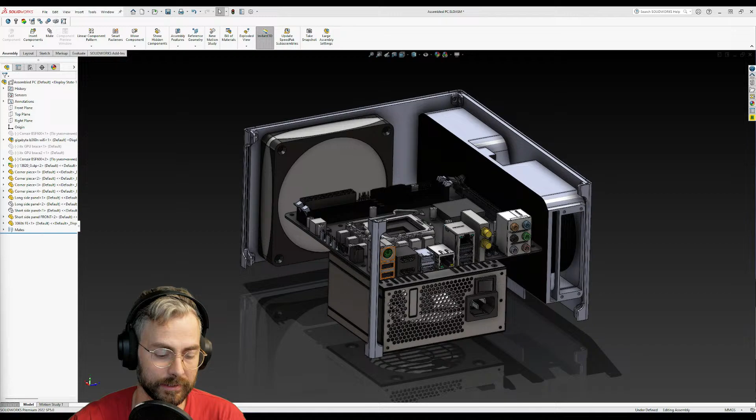I contemplated, should I keep this secretive, keep this to myself? And I was like, you know what, there's no real point, because at the end of the day, what I've done, anyone can do, at least anyone who's got some design software and maybe a few thoughts on how to use it. So we're gonna just go with it.

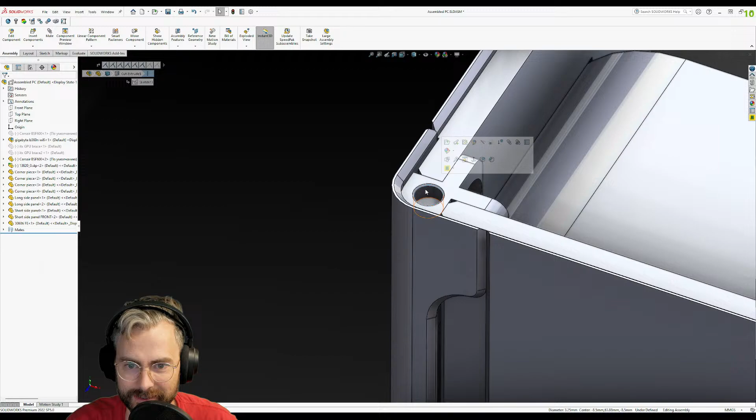This right here is a relief for a magnet to go in. And to give you an idea of how small this case is, these are the magnets that are going to be going in there. They're absolutely tiny, let's just leave it at that. They're 3 mm diameter magnets, so they're very tiny magnets, and that's going to be for the top cover to sit on.

And then in the bottom, we're going to have a couple of hot press inserts. So I've got a group of inserts here that I'm going to be utilizing for the bottom portion to screw in, because this is actually going to be the support on the base that's going to be carrying our power supply, our riser cable that the GPU is going to be plugging into.

Not really much of the weight. I might actually put a couple of bosses on the bottom to sort of support the weight of the GPU, but I've done some finagling to get this down to 7 liters.

So right now we've got a width here of 219.5. So I'm gonna pull this baby on screen. So we got 219.5 by, overall length is 244. You might be like, how the heck did you get 244 millimeters?

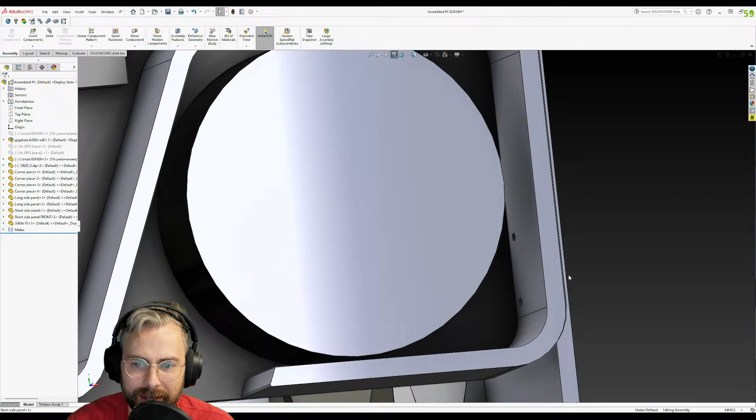Let's do a little cross section here to see a little bit of the trickery that's gone on here. So in order to get this specific design down to 7.0 liters, I've actually cut into these case panels. So these case panels are actually quite thick because they're plastic and they have to hold these hot press inserts.

So this is like 4 millimeters thick. What is that in inches for the inch folk? That would be 4 millimeters - I'm just using my vernier to make a conversion right now. There's probably 100 other ways that I could do that. Yeah, it's about 160 thou. So it's quite thick, a lot thicker than you'd have with a standard metal panel, right?

But I'm 3D printing all of this, and I'm using these hot metal inserts in order to do totally hidden hardware. So overall, hopefully with the 3D printing, this is not going to be as smooth and nice and pretty, but we'll see.

I need to adjust this design. As you see, this is just mashing into that, but I will fix that. But right now, to get this, I've actually cut into this so that we're at like, what did I get, like 1 millimeter thickness here.

So that actually I've taken the IO piece off of the GPU. That's going to be fully removed, and it's going to be sitting in there on a ledge. And I'm going to be using the IO piece mounting hardware to actually mount it directly to the case panel. And then on the other side, there are these attachment holes that are on the Founders Edition cards.

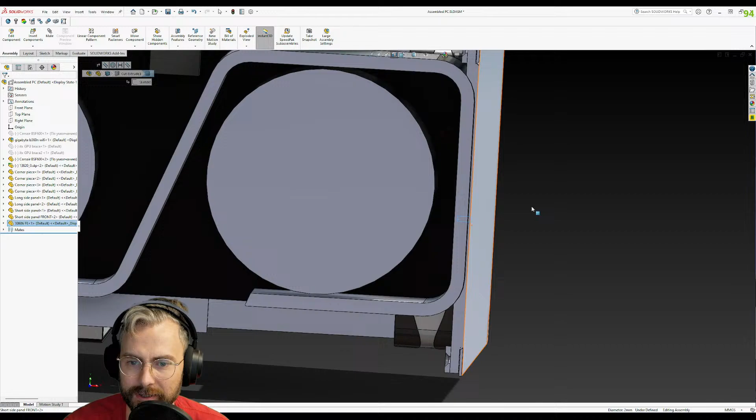And I may actually just do the same here. I might not, just because it's a little bit redundant because this is already sort of held in place and I've already got a piece that's carved out for this to sit in. But either way, we've got 244 in that direction.

And this is with the 3060 Ti Founders Edition. I know there's shorter versions of the 3060 Ti we could put in there, single fan, ones that won't even extend beyond the motherboard. And that would be great. That could actually bring this down significantly as far as size is concerned.

We could probably lose another... Actually, I'll just bring it to here because we would probably want a fan in there. 40 mil, so we could probably take another 40 mil off of this. We could probably get under 6 liters if I had a single fan ITX size card. But I've got the dual fan, 240 mil, 242 mil long Founders Edition.

So that is in there. So that's 244. And then we have our height.

So I'm going to have on the top here, there's going to be a piece that is 1 millimeter thick. And we're going to go all the way down to the bottom, which is going to have also a 1 millimeter thick part on the base there. So we're going to have 131 millimeters tall.

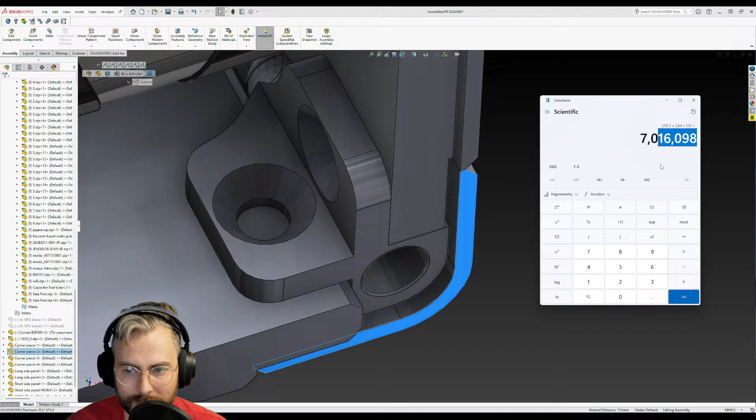To give us 7.016. Now I know you're like, '7.0 is what you said, 7.0 liters,' yes. And if you round, it is a 7.0 liter case. Give me a break, but that is the facts.

Now, my goal today is not necessarily... it's a little bit late, it's like 11 p.m., right? So my goal is, let's get rid of this cutaway, is to get this guy designed nicely. Maybe adjust this right here a bit more. Why is that so far down?

So far down. Let's see. Maybe I need to make this 129. Update. That's better.

Okay, it's up there. Ooh, how far more? Half mil. Gonna take another half mil off there. 128.5. There we go.

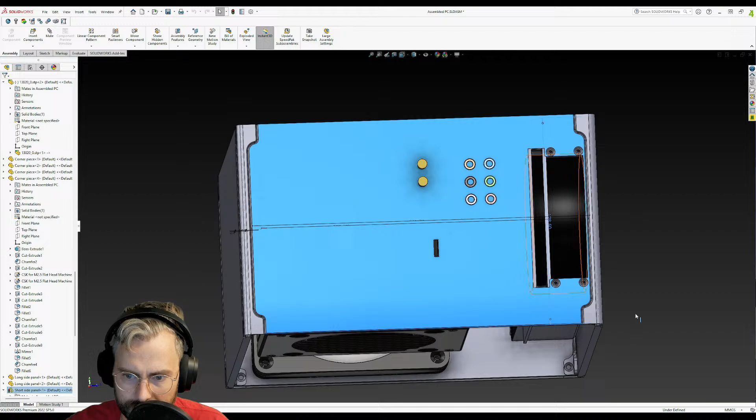All right, that will be flat in there. Now I am going to actually extend this up that 1 mil because it'll be a lot better just for keeping that line constant, and then this plate here can be fully hidden when it's sitting on the ground. I haven't decided if I want to put feet on it yet.

I can. Actually, I probably should, especially if we're going to have that fan right there. So we will probably have some feet on it, or we won't have feet, and we'll just have this sitting on its side.

And there will be your whole thing. Right, and this will pull air in here, and I can actually even fit another fan here. How far are you? Nope, can't. Well, not a 120 mil at least.

The only real wild card right now is if I can get the cable connector to bend down, because I only have a clearance of 9.5 mil, and that's not a lot.

I could probably do it. I have a cable on order. It's not a 90-degree connector, but it's going to go in there, and my plan is to have that power connector bent over and then come down in here. And then also this, the PCIe connector, right?

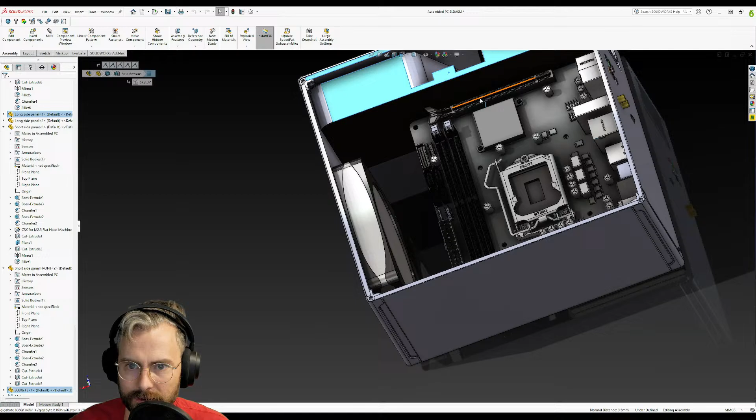You can see here, there's not... maybe you can't see, but there's not a lot of room between these two. And that's intentional. I'm going to be running the PCIe down here and then loop back around and then underneath. So that is going to be that.

But let's see, on this one here, this guy, I'm going to... yeah, this guy needs to be shortened. How far? 1.5 mil. So right now we'll shorten this by 1.5 mil. Minus 1.5. I like how you can do math in these, it's nice, helps make it a little bit simpler.

And since we are doing this side, we will also extend this part in. So I know here to here is... let's see, evaluate.

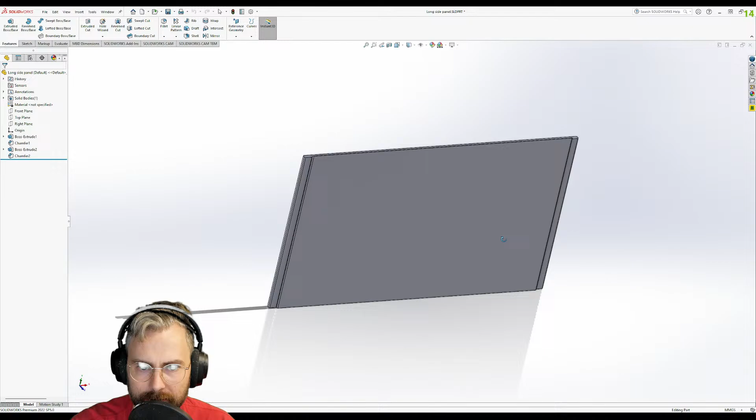We're going to measure 9.5 mil. And then from here to here, let's click away from those — here to here is 8 mil. So 8 mil and 9.5. So we're going to open this guy up. Right, here's our piece.

And we are going to go all the way up to here. I am going to convert that using extrude boss base, so we're going to add material. We're going to convert this block here, so we're going to get the sketch outline by hitting convert command. And we have our 2 circles here.

This is going to be tangent to that, tangent to that. And this is also going to be tangent to that. I'm just going to ensure we get those flowy lines. And that one went like this, and then like this.

So this guy here is 9.5 at the top. 9.5. This, I believe, is 4. And this right here, I believe, is 10. And we're going to trim these. Boop, and boop, and boop, and boop. And that should give us that flow in.

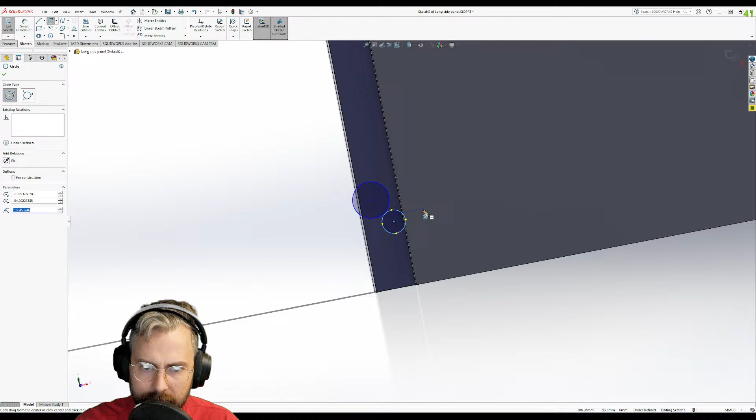And then we're going to go down here, and we're going to do again another circular circle. I could do a mirror function, but actually, I am going to do a mirror function. That's going to be a lot quicker than just trying to figure stuff out.

So I'm going to go back to the assembly, and we're just going to see. Yes, updating with that sketch. And I'm just going to see what's the center point between this guy and this guy. The distance between those two is 98.64.

Why is that so far? Okay, this will be probably less weird and more rounded. Distance is... radius, yeah, center. Okay, 112.5. And I thought this was...

Oh, I gotta measure from that. 112.5, that's 8 mil. All right, 112.5. This here's 8 mil. Make sure that's adjusted. 112.5.

Well, I'm going to put a line here. 112.5. We are going to go from here to here. This is going to be 112.5 divided by 2. Now we should be able to mirror about that. So we can mirror this guy and this guy. That does not look right. Okay.

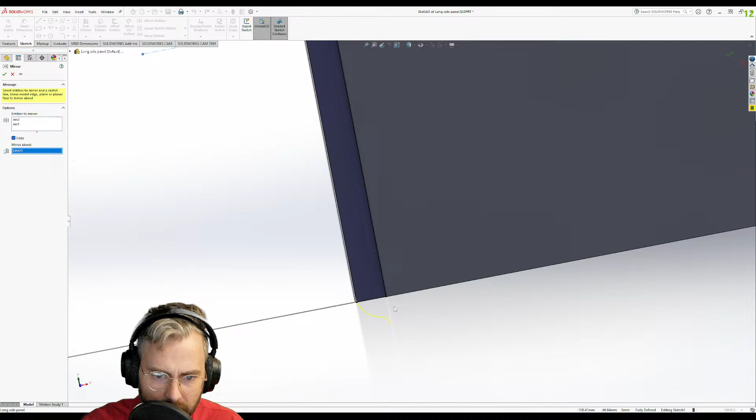Hey, where's Sabrina's stream? Why Jay's stream? A boot. I know, stop making fun of my boots. Sabrina is actually right now working on the art piece right beside me. She's a little bit streamed out and a little bit socialed out for the holidays.

Let me just remeasure between these two. Oh, it's between the small ones. That's what it is.

Yeah, no, she's definitely an introvert to the core. Much to her, my family does not help with that. Well, actually, it helps with getting her out of her shell, but there we go.

That's better. So that is actually where this needs to happen, so I can mirror these. So I select those, I created a line that's halfway between this point and the other extreme, so I can mirror them. And now it should be lined up properly on that side. And now I can add it onto the other side by going to the center point here and making another reference for this to mirror.

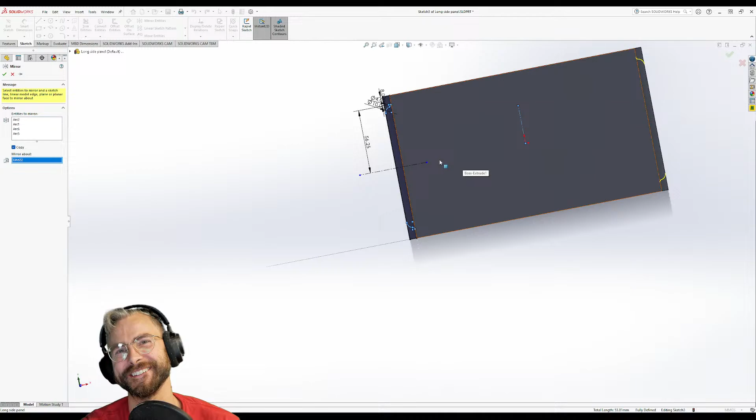They're wondering where your stream is. Yeah, you're popular. I told them you're a little bit socialed out, so you know, you're still working on it. You're just a little socialed out.

Oh, there's the hand, it's flipped. I don't know where to put my hand, it's flipped. Your hand right here. Hello, hello, and cameo. Look, she's got her drawing tablet glove on. Exclusive behind the scenes footage.

So here I'm going to convert these entities here just so I have a full squared off piece, because you can't create an extrusion in SolidWorks unless it has a fully enclosed profile. So I had to convert this to get a fully enclosed profile.

And we are not going to go blind, we're going to go up to a surface, up to surface, and it's going to be this surface. So now it's going to fill this in. And then, boop, see, look at that. Isn't that pretty? Isn't that just the prettiest thing you ever did see? Now the chamfer gets added on there, and it looks even prettier.

And here, that guy's going to go up. And then here, I am going to actually do another extrusion here.

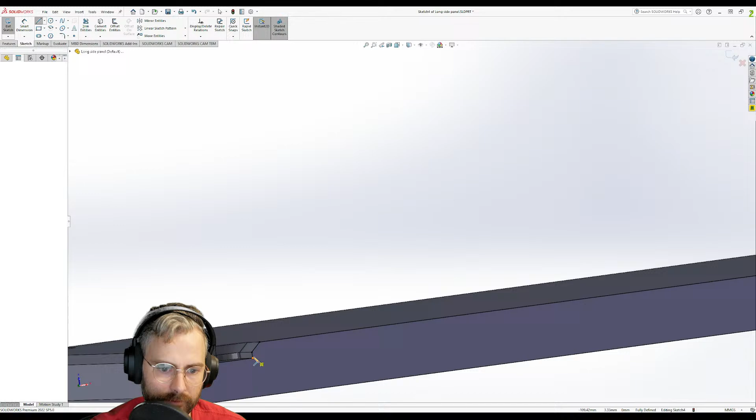I'm going to convert this profile, and because I have that profile converted, I'm just going to close this in, because I wanted to extend it. Remember how I was talking about extending that just so I can hide that bottom piece? So here we go. Features, extrude boss/base.

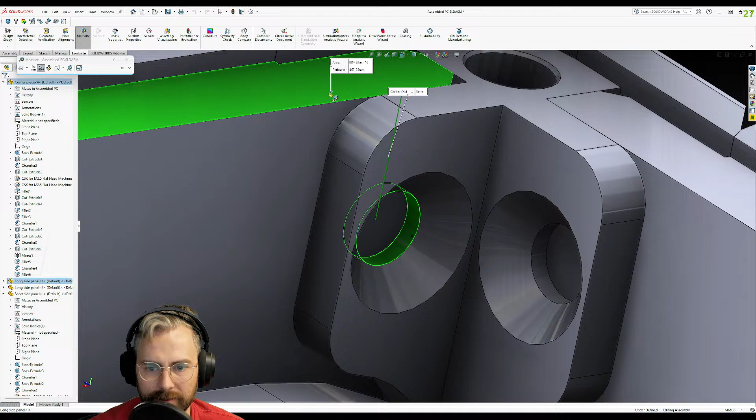So now I need to also look at where this is to this, this is going to be 5 mil, 5 milli. And then this guy to this guy, I think that's also 5 mil. Yeah, so that's going to be 5 mil. So we're going to open this, and I'm going to add the piece. Oh shoot, I forgot to get one other dimension here. This to here is also 3 mil. All right, so 3 mil from the edge and 5 mil from the tops.

And now we are going to do an extrude cut. So we're going to cut a hole, and this should be relatively easy. We're just going to do a circle here and a circle here, and I'm going to again utilize that mirror option. This is the importance of when you design a part.

So you're going to see, let me just finish this hole, and I'm going to go back to the start here. This guy here is 5 mil from the top, and this is going to be 3 mil from there. Oops, 3 mil from there.

And then the diameter of this, my hot inserts are 304. So we're going to go 3.04 to 3.5, so I'm going to be 3.10. We're going to do 3.1. Actually, we're going to do 3.15. There we go, 3.15. And I'm going to make this one here equal.

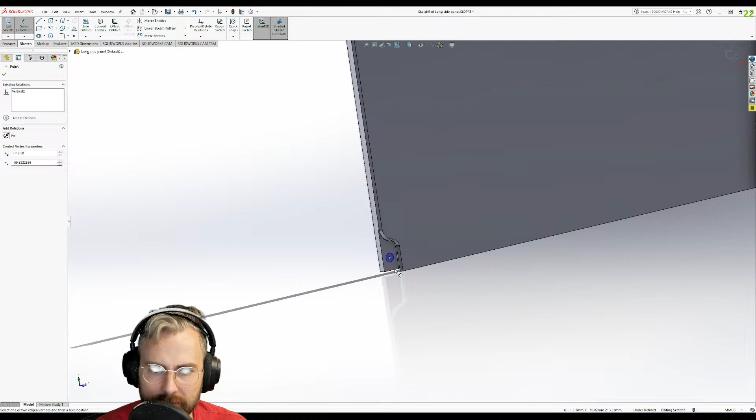No, I'm going to dimension from... yeah, and this to this. And that is going to be 5 mil again.

Now we are going to mirror these. Mirror, mirror on. Finish this hole. That's what she said. Yes, indeed. Finish this hole.

Just wait until I insert things. Oh man, there we go. Oh, engineering is a dirty language, let me tell you. It is probably one of the dirtiest. You're dealing with a lot of shafts and nuts and all sorts of things.

I used to have a professor in my fixtures, tooling and fixtures course.

All right, we're going to save that. Going to go back to our assembly and see how this baby looks. And look at that, we are beautifully aligned there, and we are beautifully aligned here.

So those holes is where I'm going to be putting these brass inserts in. So they're going to be totally hidden behind this, and I'll have access to screw in from the bottom, just screwing here and screwing there, and it'll be great.

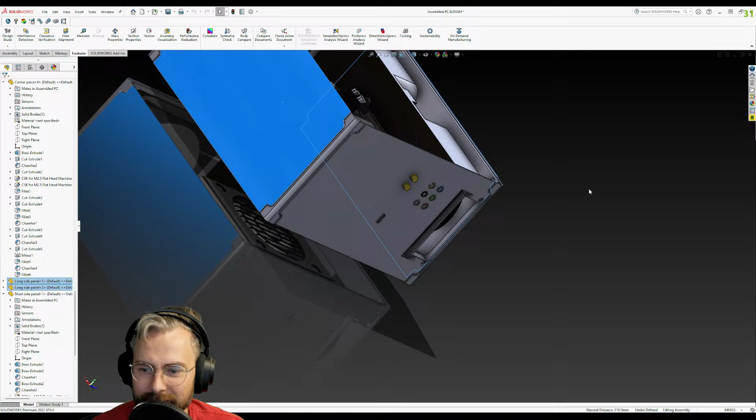So you wanted the size of my box, right? So we've got 219 mil, 219.5 mil wide. So yeah, you're looking at just under 220 mil wide.

I think this is roughly... let me just check, is this like the size of an 8.5 by 11 piece of paper? This is the legit J station. You better believe it.

Here, I'll hide this component. You see, look at that, it's got the guts and everything. I didn't design these, I grabbed these from a CAD library to put in, and I'm just using them. This here I actually grabbed from the Alphacool website. Alphacool has a lot of CAD models that you can use to design.

Like if I wanted to design my own... oh no, it's not gonna explode when it gets hot because it's never gonna get hot. All right, it's gonna have tons of ventilation. My plan is to have at least a 120 mil fan here, and then perhaps another 120 mil fan on the top.

Which will then pull air. This will pull air in, and this one will pull air out. But actually, realistically, we're going to have it probably sitting like this. So it'll probably be sitting like this.

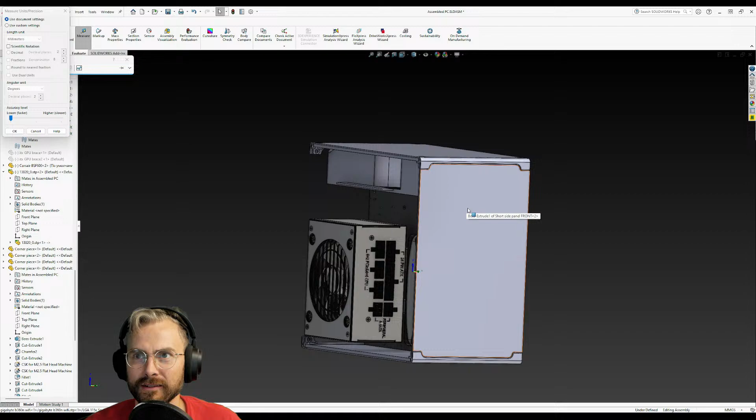I'll probably have some of my I/O stuff here, so I'll probably have any front panel I/O, maybe a power button. That'll all go here. No, it's not going to need... never going to get hot. Wait, no, wait, maybe. It's not going to have to sit in a vat of liquid nitrogen.

It's going to be using this little bitty card here, this little 3060 Ti that I've got sitting around. It's not a very high... no, it's not going to be using a 4090. No, it's a little 3060 Ti. Or who knows, maybe I should sell the 3060 Ti and buy a smaller GPU. But yeah, it's not a super high powered one.

I'm going to be using this for my home theater PC. That's my plan, which is basically going to be my Nintendo emulator setup. I did a Nintendo emulator with a Mac Mini, so I'll probably be doing something similar with this.

But yeah, so we've got this panel done. Looks nice, pretty, right? Sits right up against this, but our GPU is going to get zero airflow. So let me just open this part.

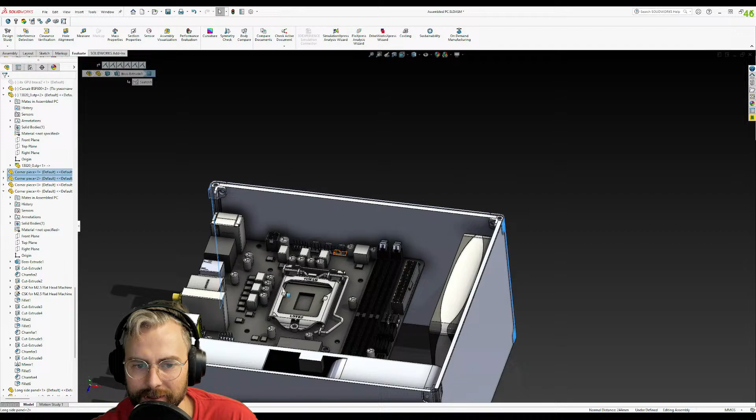Let me just close that window there, and close this measurement thing here. Oh wait, I didn't even finish measuring it for you. Anyways, 244 mil long, and then high, it's only like 131 mil high. So it's quite short, if you know what I mean.

I've heard you talking about the N64 controller made by Nintendo, and I've been looking for it, I can't find it. Can you please send me a link to it? I don't know, Amazon Japan maybe. I don't even know if it's available in North America. If it isn't, then maybe when I go to Japan I'll buy it and bring it home, because I have to buy it from Nintendo themselves, so I can't go on Amazon and get it, I have to get it from Nintendo. So I'll have to go to their headquarters in Japan and be like, 'Sumimasen, controller desu?' Yeah, they definitely just sell the poop ones.

All right, so now we're going to add some air holes to this. Actually, you know what I might do? What might be a good idea is, yeah, I'm going to do a little bit of a cutout in this.

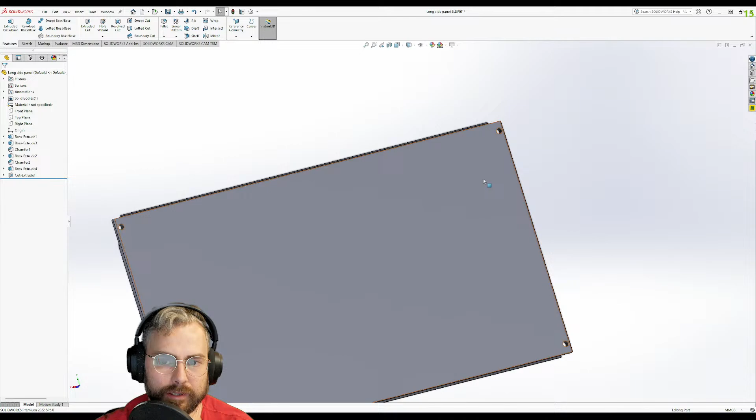And then I'm going to do another cutout. Or should I just do... just thinking 3D printing wise, if I do a cutout in here, okay, yeah, I know. If I do a cutout on this side and lay it flat on the bed and print it, lay it flat on the bed. Oh man, see, now I have to worry about everything I say, Keiko, now that you're here.

All right, so if I'm laying this on the printing surface, let's see, if I lay this flat on the printing surface, it'll print fairly well. But if I try and cut into this side to make it thinner, it won't. I'll have to... actually, no, the majority of this is sitting on here. If I add supports on these corners, I should be good.

Yeah, you know what? I am going to do it. Plus, it'll use a whole lot less material. So, we are going to do a little cutaway, an extrude cut. Now, before we do that cut, I'm just going to do another convert command. So that brings that there.

And this should be relatively easy. We're going to offset this. All right, we're going to reverse this. When I hit offset, it just grabs the whole chain and offsets it in. It's a nice little frame here. Let's offset it in maybe 5 mil. I think 5 mil's nice, yeah.

5 mil's not bad. Yeah, we'll go 5 mil. And then we will... oh, we got some bad stuff there. Let me just undo that. We're going to offset that again. Maybe we'll offset a little bit less. Let's go like 2 mil.

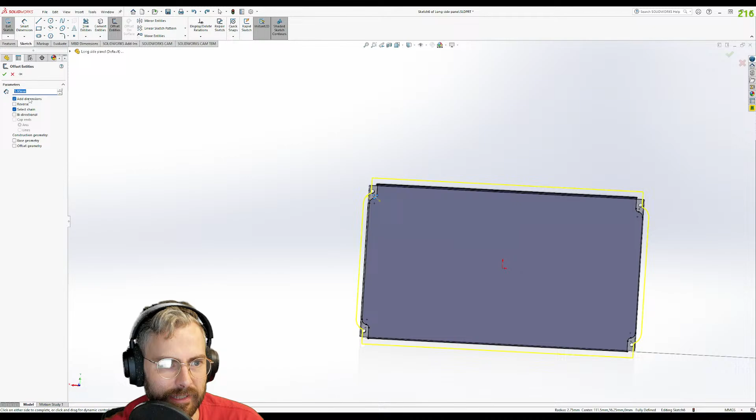Let's see, we're going to go 2.5 mil in, maybe. There we go, got a nice little line here. Now we're going to extrude this, do our extrude cut in here. We're going to cut this out that way, not through all. We're going to go blind. I'm going to offset it from this surface. I want to leave at least 1.5 mil. Let's say 1.5 mil. I don't want it too thin, but I don't want it too thick either. So we're going to offset that 1.5 mil. And then we're going to add a nice little chamfer around here, because why not?

Chamfers are cool, man, not fillets. Get that garbage out of here. Chamfer that. Not a 10 mil, we're going to do like a 3 mil chamfer. That 3 mil chamfer is way too big.

Oh, you know what we're going to do first? Before we do the chamfer, we're going to do a fillet here. Oh, that's nice. No, we're not going to do 10 mil, we'll do 5 mil. Yeah, 5 mil's got a nice little flow to it, get rid of that stress point we're getting in that corner. Yeah, it looks nice. It doesn't really matter that it looks nice because this is all going to be inside. What is wrong with me? Yeah, if it's too thin, you don't want it to rip during action.

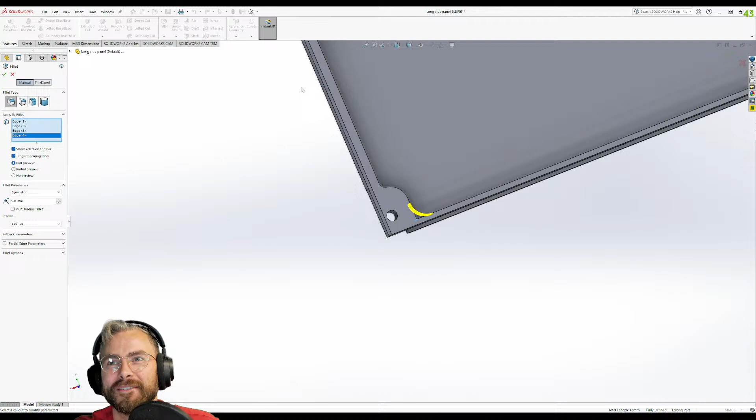It's way too big of something you've never heard before. Stop giving, it's way too big. I might do Alan Wake tomorrow too, you never know. Oh man, you never know, you never want it too thin. That is true. Oh my gosh, you guys are killing me. Oh my gosh. I've definitely heard it's way too big. Listen, I don't want to, I don't know. I feel like you both are gonna gang up on me in here.

All right, let's go here. I'm gonna do a nice chamfer on this, maybe like what, 1 mil? Let's see how that looks. That's a little bit big. Let's go 0.75, I don't know why. I just like to break edges, if you know what I mean. It just looks nicer that way, right? Boopity boop.

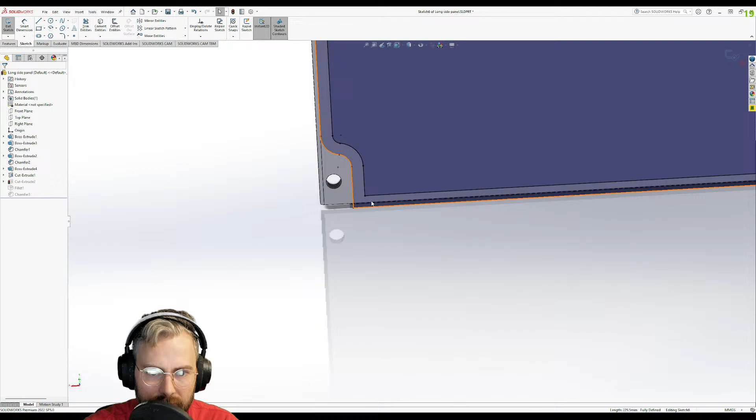Actually, you know what? This bottom part's here, no, those bottom parts, edit the sketch. I am going to actually convert this one, and then I'm also going to convert this one. And then we're going to offset those two, not going to select the chain. I'm going to offset that in 2.5 mil. I accidentally grabbed the... oh, come on. All right, I just have to do 2 different offset commands. There we go, 2.5 mil in.

Okay, let's see, let's get back to it. Getting harassed on my own stream. We're gonna get out of here, and then we're gonna update this cut extrude, edit this feature. So rather than that contour, we're gonna select the space. It's gonna ruin my fillet, which I'm fine with. We'll just edit it, we'll use the new edges then. I'll just fillet with that. Here we go.

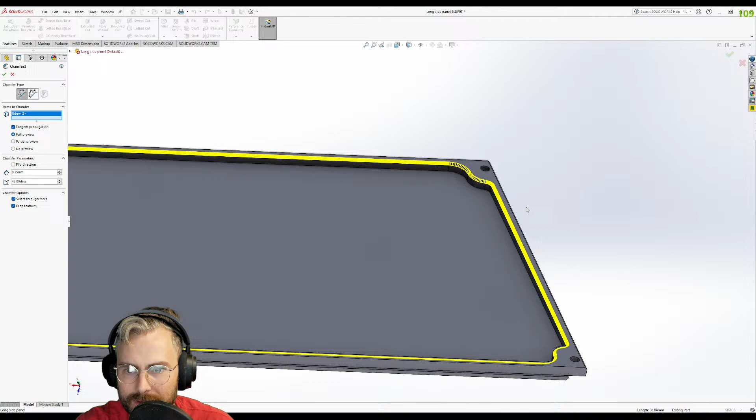Oh no, not the fillet. No, we're using the fillet for the interior here, and then we're going to use the chamfer later on. Don't you worry, you start with the fillet and you end with the chamfer. There we go, edit this chamfer. Yeah, I know you're missing an edge, you're just losing your edge. All right, now that we've got a little bit of a thicker wall on this guy. Actually, you know what? I'm not gonna do that. All right.

So here we go. Now we are going to extrude this, and let's add... I don't know, what should we do? Should we do a whole pattern?

Confused, that's what she said. Oh no, not the fillet. I don't even know what she said that about.

All right, so we're going to put some air holes in here. Now what should we do? Should we add some hexagons? Should we add some circles? Should we add some slots? Oh yeah, the air holes, this is to keep it cool. Do we want to go slots? Hexagons, bestagons. All right, we'll do hexagons.

Let's see, we'll start in the center with a hexagon like that. Obviously, we'll do... All right, we'll do smart dimension. This guy here is going to be what? The inner diameter of that hexagon. We'll make it a 5.

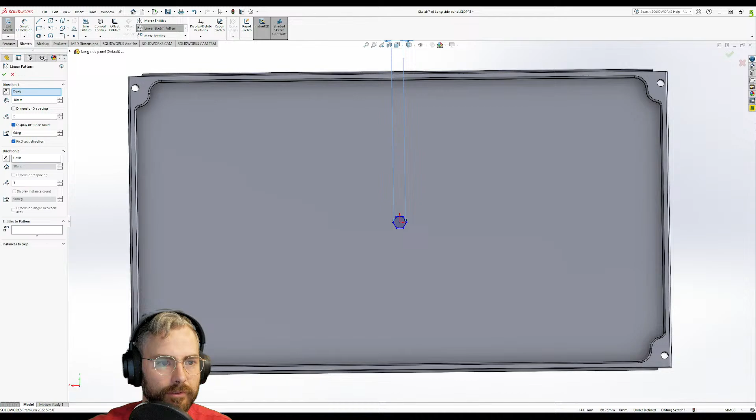All right, so let me do a pattern here, where we are going to go with this guy. Actually, you know what, I need to first fully define it. I need this to be black. There we go, now it's black, which means it's fully defined. If it's blue, it's not good. You like everything you just heard. All right, we're going to see what we can do here.

Let's see, we'll do a linear sketch pattern. All right, so we'll grab this hexagon here. Boop, boop, no this is not direction, not direction 2. We are going to go, yeah, direction 1 is going to be that way, direction 2 is going to be that way. Entities to pattern: this, and this. And we are going to go, how many? 1, 2, 3, 4.

And then we're going to go this way, 2, 3, 4. And we're going to increase our spacing here. Ooh, that's nice, that's really close to that edge there. Okay.

No, no, no, no, no. Widen these guys. Can this go to there? Ooh, will they all radiate? Octagons on the other side.

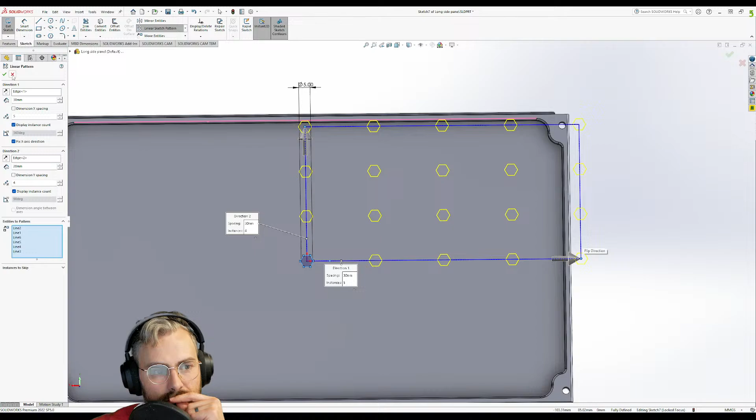Hexagon, octagon, I think you're just getting a little bit out of hand here. This is a little crazy. I know there's a lot of sides to this story, but this is maybe too many sides. Right? Let's see, we'll go... yeah, because if we space it out... no, let's maybe get rid of that pattern.

We'll do something like this. Maybe we'll do a radial pattern here. So we'll do this guy and this guy here. We're going to go vertical on that, vertical on that stuff. And then we just go.

One day I will let you meet my sister with her civil engineering jokes. You two will get along, I have a feeling. Although civil engineers aren't real engineers—I'm just kidding, they are real engineers. Please, civil engineers, don't close all my roads, thank you. No, I have a civil engineering friend, I always make that joke. But just being a mechanical engineer, I don't know. I think there's a certain amount of elitism that goes along with mechanical engineers. I don't want to be that person though, you know?

Let's say we go 2 mil out and then... I don't know, what if this even just goes right to here? I'll go collinear on that.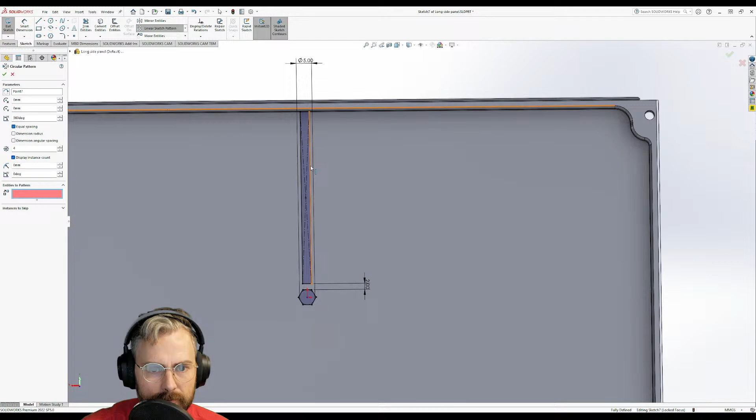And then instead of this, we could do a circular pattern. Parameters, well, we'll go around this guy here. Entities to pattern, not that. The point that we're going to be going around is going to be there. And entities, so we're going to pattern this, this, this, this. And we'll do 6. See? Now they're all coming off the edge there.

See though, if we have that, we could do that, but that wouldn't be good.

She had dreams of building her own bridges, and then she did. She inspects bridges in the middle of nowhere, New York, upstate. Yeah, that makes sense. You know what she should do? She should get her PMP, her project management professional. So my friend, he's got his PMP.

He basically just says what he wants. He's from Australia, he was working in LA, and he basically decided partway through working at this place that he's gonna go back to Australia. He's like, you know what? So he just goes to his boss and he's like, I'm going to Australia in a month and I'm not coming back. I can work remotely if you're all right. I can come in for morning meetings and maybe some evening meetings because of the time change, but aside from that, I'm going to be working from home in Australia. And it was so funny because basically they were like, okay, we'll let you do that.

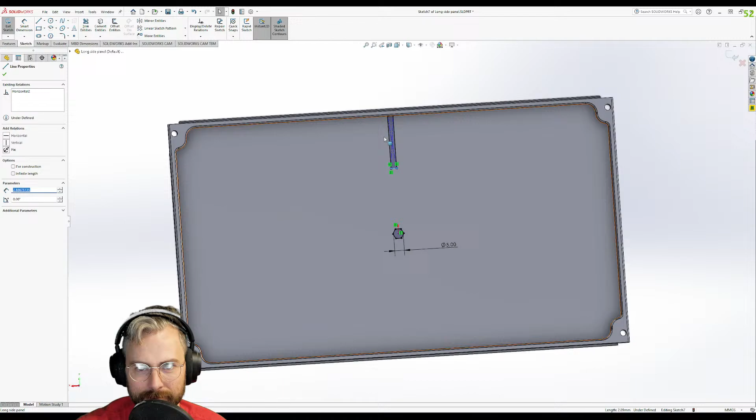I'm going to get rid of this slot. I don't want to slot shame, but the slot has got to go.

Oh, she's... I know she's making more money freelancing, inspecting rides for Six Flags than she is at her main job. I have to listen to her complain all the time about not using her main degree. Such a loose slot.

Oh, those slots. All right, we're gonna go linear pattern with this guy here, and we're gonna pattern these hexagons again. I feel like, yeah, you know what, I should do another hexagon here. And then pattern this, so this here and this here will be parallel. And also, I don't know why this is suddenly blue, but this will be, I don't know, 1 mil between them. These will all be equal. And what, I think this will be, can this be?

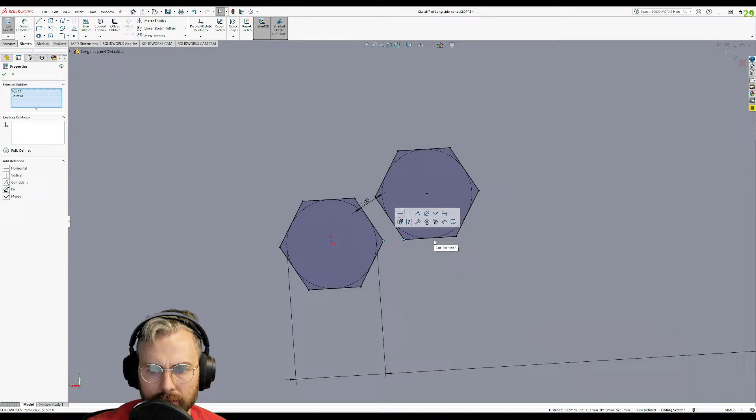Okay, good. So there we go. Can I do my pattern now? Will this pattern work for me? Perhaps.

Let's see, distance. Oh my, that's a lot. One second here. This to this is what, 1.15 mil. This to this is what, 9.81 mil.

Fun kind of side story, I did manage to get her into some basic level of gaming with stuff like Mini Metro, All Quiet Roads, and Polybridge. Polybridge sounds like something a civil engineer would love.

Just saying. I'm gonna get rid of that 5 mil on that, I think it just doesn't translate to a nice number on these. I'm gonna do this 5 mil instead, that 1 mil, so now this should be a nice number. Distance 8.65. No, it's not. 8.65 distance between these, 1.15. Distance. All right, we'll do this pattern here.

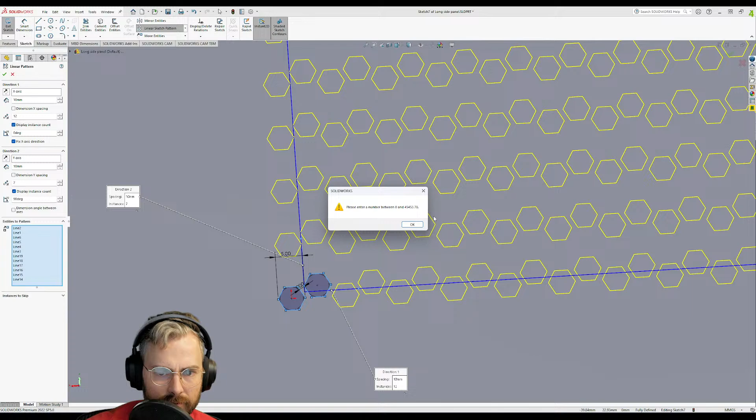That's a little better. There we go, and make a little string of hexagons just traveling along here. But the vertical should not be 10. Okay, we'll do 5. Beautiful, ah, that looks so nice.

Ah, no, not like that. There we go.

Isn't that just delightful? Look at that. We've got hexagons all over the place. It's gorgeous.

You know, it's a good basic game to get someone into gaming, Devil May Cry. This is a lie. I think that is a lie. Determined that that was a lie.

All right, you know what I'm going to do now? I am going to convert that inner portion.

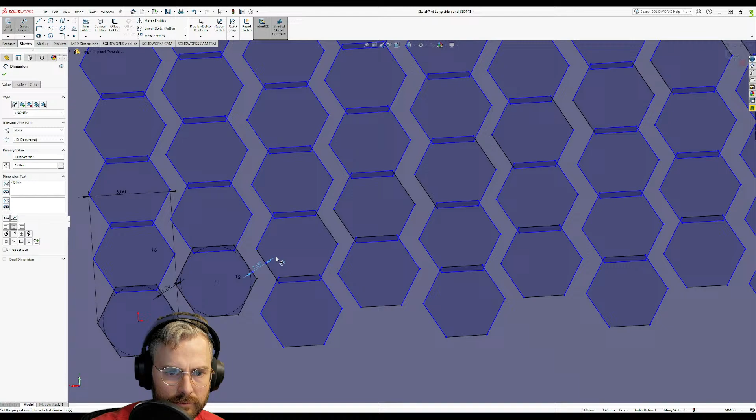What if I just make this 1? And I made this right here 1. Well, that would be interesting, wouldn't it?

And what if I made this to this? Oh man, what did I do? What did I do? Ooh, that actually creates a neat little zigzag slot pattern.

Ooh, maybe I would do a slot pattern on this. Let's see. We can make that 5. Ooh, that's not a happy 5 there.

You know what? What if I made it like this now? 1 mil? But that is not 1 mil. Oh, well, you know what? I'll accept it. Is that like an angle now? I think it is. Oh, that does not look good to me.

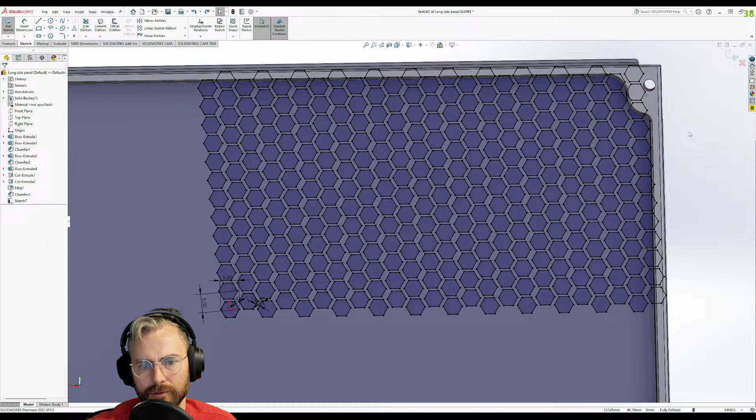What did I do wrong? What did I do wrong? Yeah, you know what I should do? Not make an absolutely massive sketch like this, because this gets heavy. Very heavy.

What I should do is put in another one here. These will be equal. This will be... no. No, no, we will not do that. Come on. Allow me to select you so I can delete you.

Horizontal. No, we're going to pick those parallel. And yeah, we'll go 1 mil here, and 1 mil here. Oh, I like that. Kind of like that pattern.

And now I'm going to do quickly just a linear sketch pattern. We're going to pattern these. And we're not going to do it in that direction. Or maybe we'll just do it in that direction.

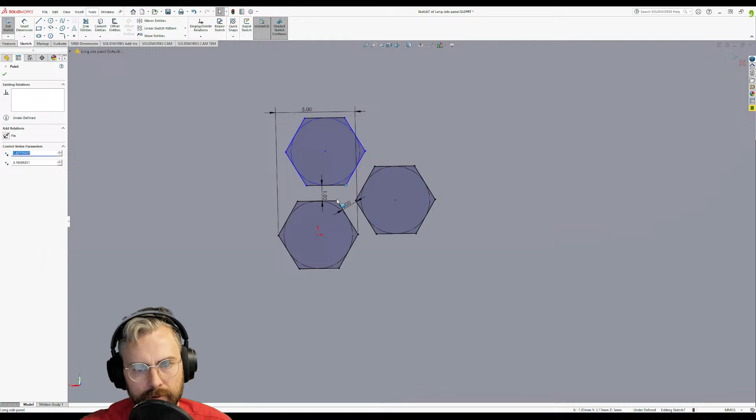These and this, oops, those will be vertical. For the sake of that. And then what actually needs to happen, so I can put some little lines in here.

I'm gonna put you there. Get rid of that. This is just gonna go horizontal. Not what I wanted to do. Connect that. Lock that to the midpoint of that line.

This line is already locked. So now we click on that and we make it horizontal. This will move this up. So this point is centered between those two.

Sure. How did you do that? Thought I made you coincident with the midpoint on that. And this. Yes. That is why. I need to get rid of that.

Now, if we make this horizontal, then it moves up. I was like, I will show you this neat trick. It does not work. Well then. 1 mil. We're going to go here. We're going to go 1 mil here. There we go. That should give us a nicer, much nicer pattern.

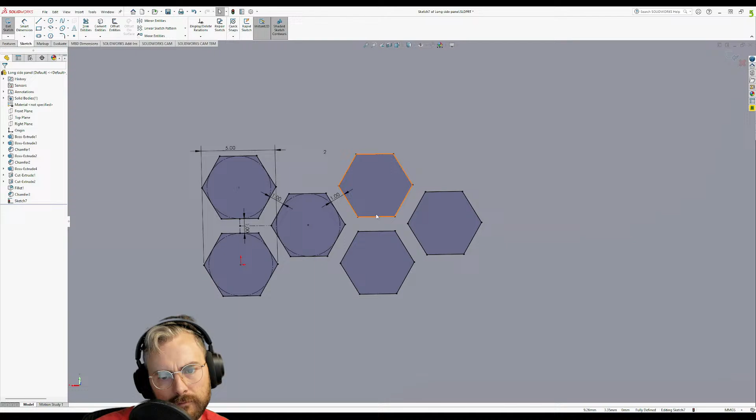Ooh, that 9? Is it gonna be 1 mil between those two? No, it's not. One. That's not how I want to do it, though. All right.

I am stalling out on this sketch pattern here. That is not at all what I wanted to do. Why must you do this to me? Entities to pattern. You know what we're going to do? We're going to extrude cut through all this.

All selected contours. Yes. Cuts them all. There we go. All the air holes we need right there. Boom. Done. No, I'm just kidding. Now I'm going to do a linear pattern.

That direction. Actually, we're not going to do that pattern yet. Just need to know from here to here is how far. 9.98. Measure, measure, measure. We're going to evaluate. We're going to get a little bit of a nicer one. No, that's 9.62. So 9.62 millimeters.

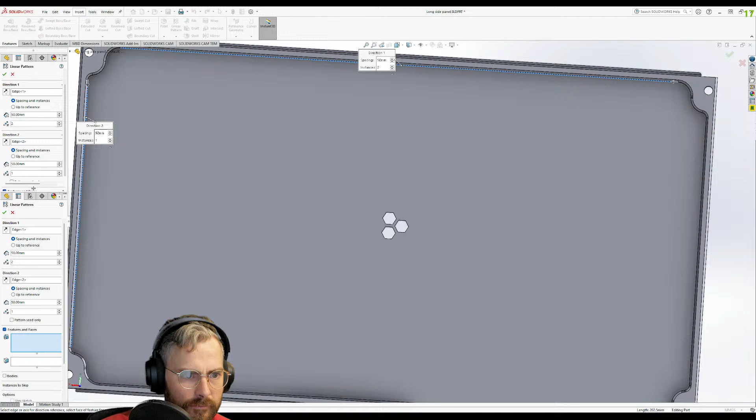That's going to be our spacing. 9.62 millimeters. So we're going to go back to here. Linear pattern. We're going to do that one. 9.62, 9.62. There we go.

Okay, I can do that. I can live with that. And then we'll go up. Now we'll go here, 9.62 as well, I believe. 6.2. Not 6.62, 6.2. And we'll go, oop.

Oh, he's skipping one here. Oh dear. Oh, that actually looks kind of cool though. Oh, instances to skip. Nice. I can skip that one in the corner. That's me in the corner.

Now we can do instances to skip. This one. Boop. That's fun. Oh, that's really fun. And we'll go like that. Oh, that's an interesting pattern. I actually don't hate it, but...

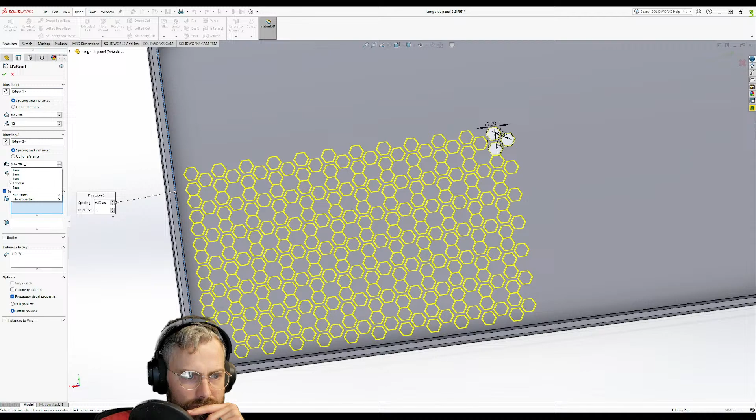Interesting nonetheless. Let me see here. Edit this feature. Oh. Should this have been like 10.62 maybe? That might have done it.

All right. Additional instances to skip becomes that one, that one, that one. Actually, no, we're just going to drop one of those rows. There we go. Okay, I kind of like that. I think that looks all right.

And now we will start mirroring. So we're going to take that pattern and we will mirror that pattern about the right plane. Perfect. Boop. And then we'll mirror that about the right plane. And then we'll have all the holes that we need in this little old panel here.

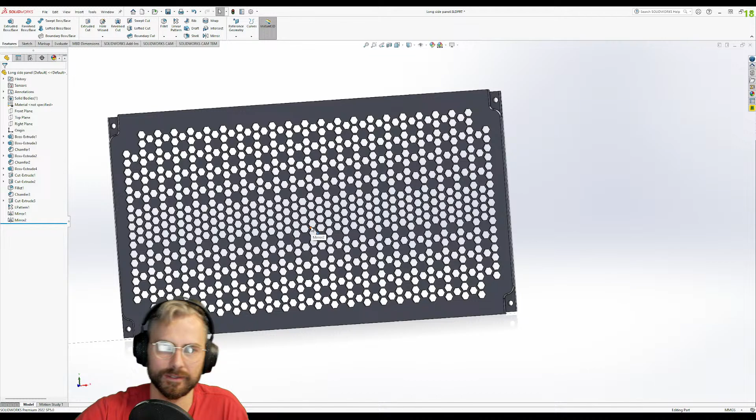Oh, I like that. I kind of like that. I kind of like how the center is that sort of mixed one, and then the rest. That is kind of cool.

I wonder if I should have had another piece in that kind of mirrored, like that bottom section there, maybe. What if I did another one here? What if I just added another hexagon? Let's see what it does. Let's just add one and see if that propagates.

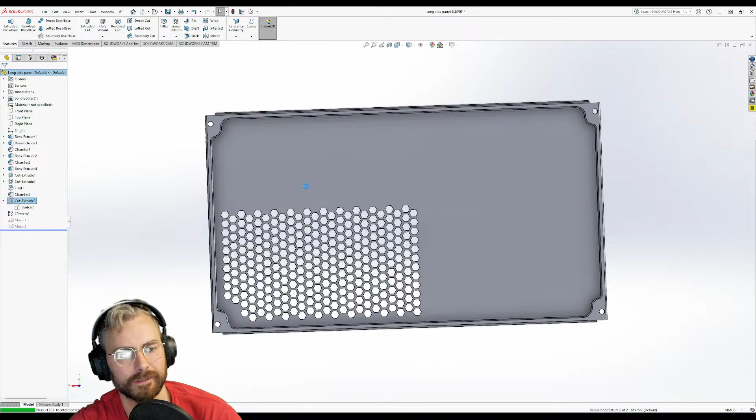Ultimate ventilation achieved. Loading, loading. Oh, Solidworks, are you going to take a dump? No, you're not. All right, save, quick, before it crashes.

There we have it. That is a nice mesh pattern. Oh, it even has a little offset here and a nice little surface. So if I did want to, I could actually probably put some like dust guard type mesh in there.

Let's see how this looks on the old thingamajigger here. How do you look on the old PC case there? Oh yeah, that's beautiful. Very nice. Yeah, we got a little space here now. Now our fans on our 3060 Ti will not be starved for air. Ooh, both sides. Hot dog. Done and done.

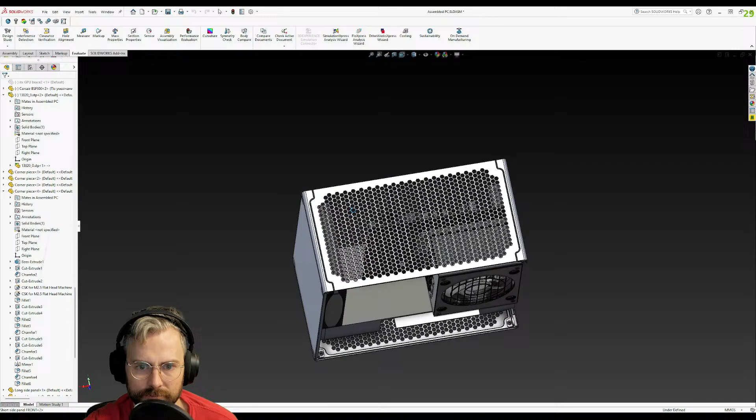Now, I am debating on this part here to actually add like a ledge on it for this to sit on, so this doesn't have to have like a large piling that goes all the way to the bottom. So I do have these as the same, and then I'm going to probably put a similar pattern on that there. But I think that looks pretty nice. We're going to have this like so.

These babies here were a little bit of a trick. I had to bring this GPU as close to this edge as possible. It was such a pain. So I had to really carve into this. These used to be just a straight piece, but in order to get the spacing to get that in there and have that clearance, I had to carve into this. It's pretty nuts.

And actually, here's one of the pieces here that I printed. It's really quite small. Like this is the height of the case right here. So it's going to be a really tiny case. And it's only once you start printing it out do you realize really the scale of how small this case is going to be. So I've got a few of these guys printed.

I think I might actually set this guy up to be printed tonight. And I'm very curious how that's going to end up looking. I'm actually very curious as to just, yeah. I'm going to probably set that up and run the program on it.

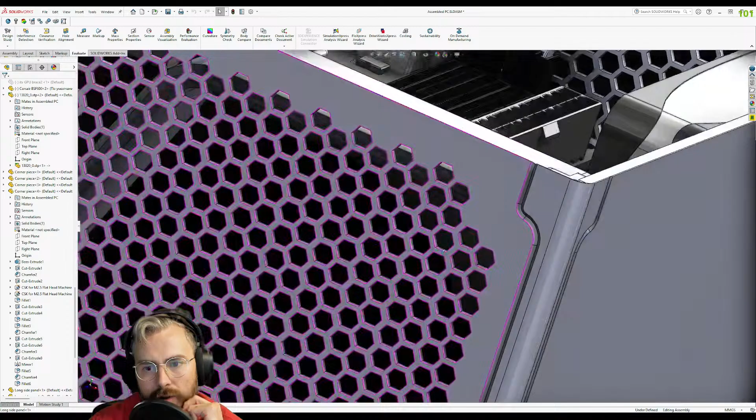Ooh. Oh, I've got an idea. What if I take this and I just do a face chamfer on this? Let's see. Will this crash Solidworks?

Will you crash Solidworks? Will you crash? This is usually how you crash Solidworks, by giving it a buttload of chamfers or fillets to do. Usually it's the fillets that kill it. The fillet will kill it.

But look at this, the wheel's just spinning. The old 5950X is just chugging away, begging for something to put it out of its misery. I'm actually curious what my... no, not there. Ah, it's running a command. Okay, we're gonna wait for the command to finish.

Just gonna run. Ooh, dear. Just gonna run my hardware command here. Hardware info. I'm just very curious what is happening right now with my CPU, as SolidWorks is just trying its darndest to do this. Well, let's see. And the CPU is sitting at around 55 Celsius.

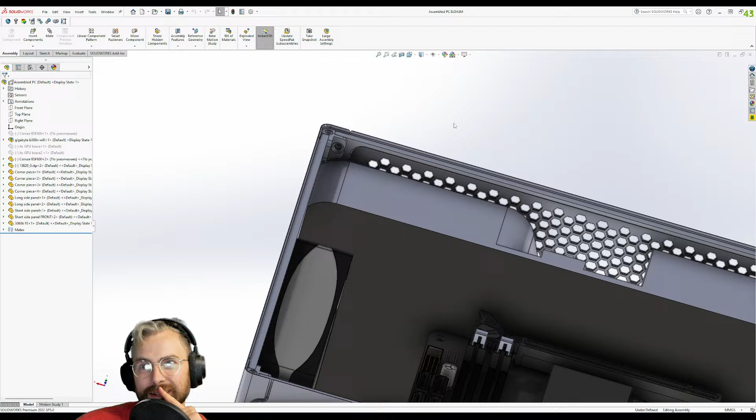He showed us his interview stuff. Oh man. Elon is my favorite of all the lizard kings.

Oh, you did? Nice. Did they call you back, or do they know when they're gonna make a decision with that other interview? I wouldn't be surprised if you got a call from this other interview.

Oh, okay, they're on Christmas break. Perfect.

But yeah, this last one, this Gong Show interview you just attended, I wouldn't be surprised if they call you and say, 'Would you be interested in working here?'

Okay, nice, that's awesome. Were they pretty organized with their interview, pretty structured? You get to see a lot about how a company operates, right? If they're just sort of going off the cuff, speaking with other candidates, whatever.

You know what? You're probably up in there. Who knows, maybe they're looking to hire a few different candidates, right?

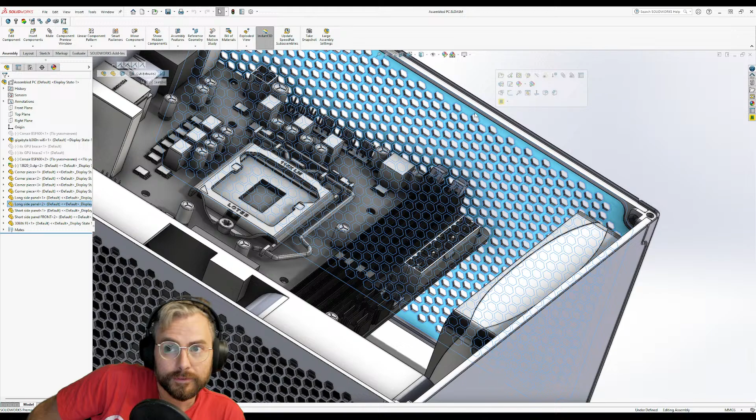We're moving forward with candidates, including you, now, and hope to have a final decision by the first week of January. Okay, that's nice that they tell you when they're gonna make their decision, right? Because then, at least if you don't hear anything in the first week of January, you've been passed up, and you're not holding out hope.

Well, that's good. That shows that they're an organized company and they know what they're doing. So that's the kind of company you want to work for.

A 3-day break with no notice to you. Yeah, it had, oh okay. Yeah, that could be a little bit rough.

Let's see this design here.

I'm gonna do a similar deal. So here's that panel, you can see where there's the cutaway.

Yeah, they probably wouldn't let every candidate know, but...

I'm gonna convert that. Offset that and convert this guy here too. Convert this guy here too, and then offset this guy. Oops, reverse that. Put my thing down, flip it, and reverse it.

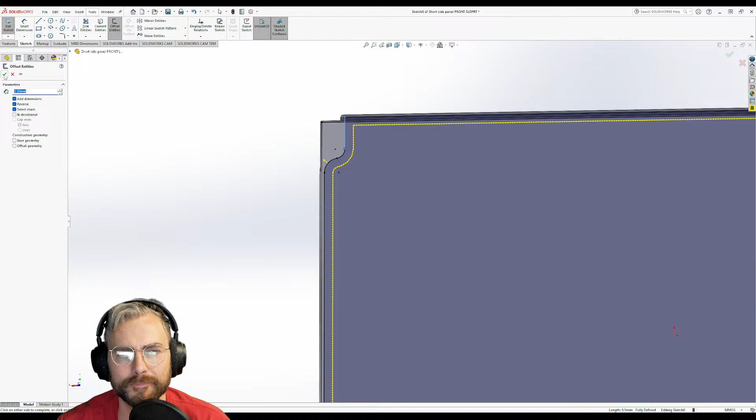Well, you know what though, it'll probably, they'll probably figure it out. And I'm pretty sure you'd be on there, even though your contact was sort of gone for a day or so.

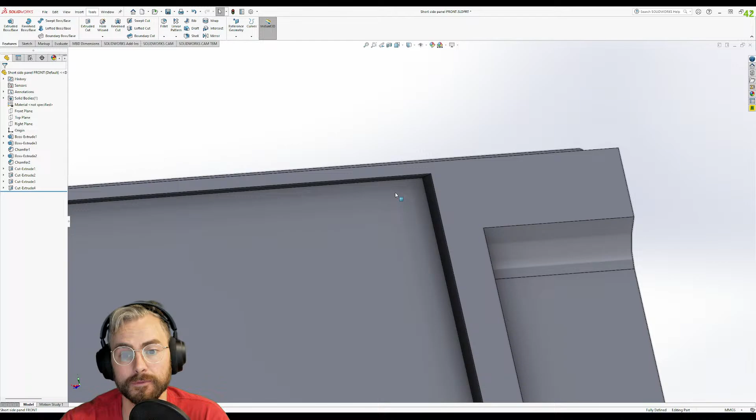Okay, I'm just speaking from somebody who has interviewed people and interviewed candidates. Yeah, if there was somebody emailing me for information while I was away on vacation, or family emergency or something, I would feel bad when I got back to the office that I didn't email them back.

Especially if they had good questions about how they can be prepared, I think those are all marks of somebody who's serious about the job, who wants to do a good job, and takes pride in their work. Those are things that I, as an interviewer, would want to see in a person. Those would all be green flags for me, like, 'Yeah, this person for sure.' So I wouldn't be too concerned in that regard.

Do a little hole here. I think I did 3.15. Is the diameter on those other ones? Yeah. It's 3.15.

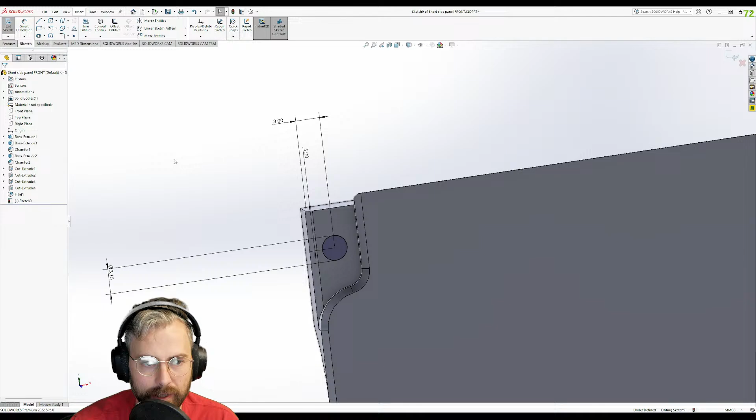Yeah, the only red flag that I ever had from somebody that I was interviewing was somebody that came super early for the interview, like super early. There were multiple candidates I was interviewing for, and they were just like... we're like, oh, do you want to step out? There's a cafe down the road you can go hang out while you wait, because there's three other people coming in before you. And they said no. Then it just set this awkward tone for the entire time, and yeah, it was super awkward.

And thankfully, too, well not thankfully. Okay, yeah, thankfully, they didn't have a lot of experience. I say thankfully mostly because...

When I do that, I can just make this vertical with the other.

But yeah, I say that too because when I'm interviewing, I already know if the person is capable of doing the job before I call them in. If I don't know they're capable, I don't call them, because it's a waste of my time to call people I don't think are capable or educated enough to fulfill the position. Usually I'm just interviewing them as a vibe check, to see if they fit with the team and do well or not.

And oops, we're gonna offset this sketch. Not offset, we're gonna mirror. Gotta put a reference for the mirror first. Oops. And now we can.

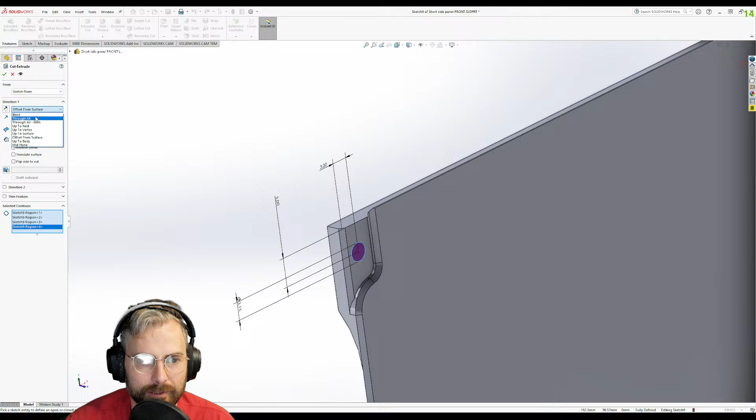So yeah, that's for me when I'm interviewing, that's more so about it. Also any cues as to whether or not they're going to take the job seriously, how they conduct themselves. Are they going to be just a pain in the butt in general, or somebody who's like, oh, I don't have my own car, when it's very clearly in the requirements that you have to have your own transportation, and there's no public transit nearby? So it's like, what are you expecting?

Let's see, there's a chamfer here that I need to do, yeah. That guy needs to be chamfered as well. Everybody wants a chamfer.

I had one tell me you need your own MacBook. Like dude, I don't have a $2,000 laptop. Honestly it's really weird that somebody would require that. It's like, listen, if you can code, unless they have some sort of strictly controlled office ecosystem... I don't know. Oh fair enough, if they've got that, then if you can't transfer your code from one to the other, yeah, that makes sense from that perspective for sure.

Got this here. I'm gonna add a... ooh, gotta check out what the old bolt pattern is on a 120 mil fan. Hmm.

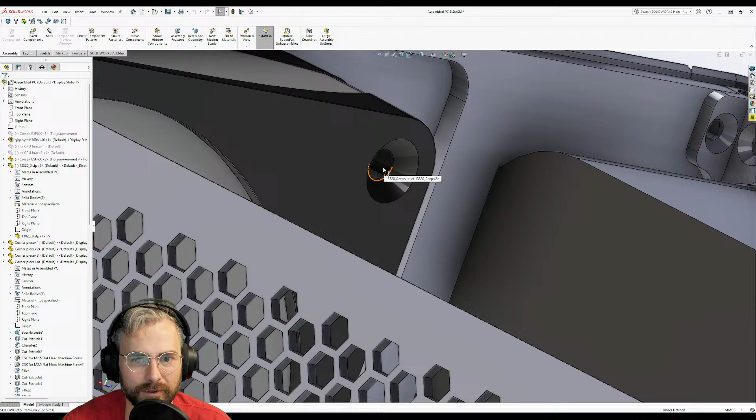What are we looking at? Distance... 99.76 millimeters. Really? 99.76 millimeters. Doesn't make sense, or does it?

A great resource by the way. Yeah, oh, they're saying 105 millimeter. That's from Noctua. You know what I'm going to trust? Where is... oh, here's Arctic. They're talking here. They're saying 108 millimeters.

Is it 105? 108? You know what? You know who had this? Silverstone has an excellent library. Fan hole spacing, let's see. I'm looking it up. We're looking at, what did I say? Silverstone. Yeah, Silverstone Technology, they have an excellent blog of dimensions on all sorts of PC components, standards, all that jazz.

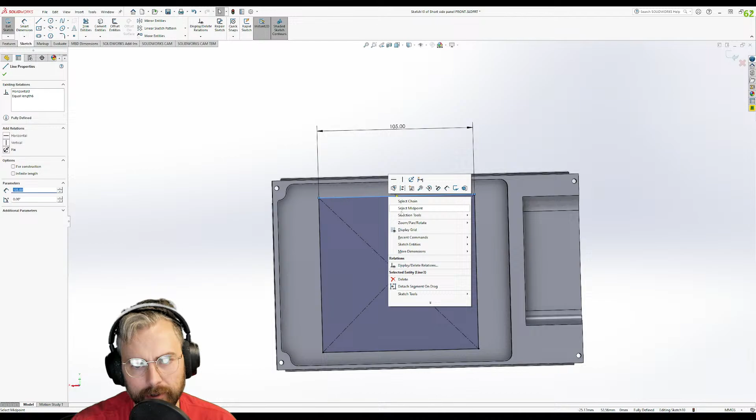I will not do that. We are going to select the midpoint on that. And we are going to make that... no, this guy here. And this guy here. I'm going to get rid of that orientation there. And we are going to...

I don't know, you have zero confidence in your interviewing abilities now. You know what? Different interviews or different interviewers have different things that they prioritize. They have different things that they look for.

I'm gonna move that there. What's going on? Sit. Oh, I think it's this guy here. Yeah, that's what I'll get rid of. Midpoint. There we go.

But yeah, bad interviews, you can't really put yourself out for bad interviews. The only bad interviews are ones where you're not qualified for the job. If you went to interview and you're qualified for the job, I think a big part of that is finding out are the people that are here, are they the ones that are going to be fitting on the team? Are they going to be able to...

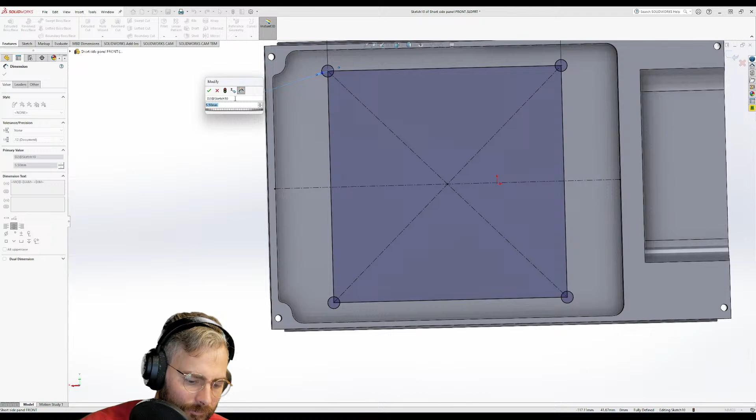But yeah, it's kind of vindication that the company themselves don't really know what they're doing. Like when you get like, when you go to an interview that you know you're qualified for, and they just sort of like totally... I don't know. See, we got some pretty flat.

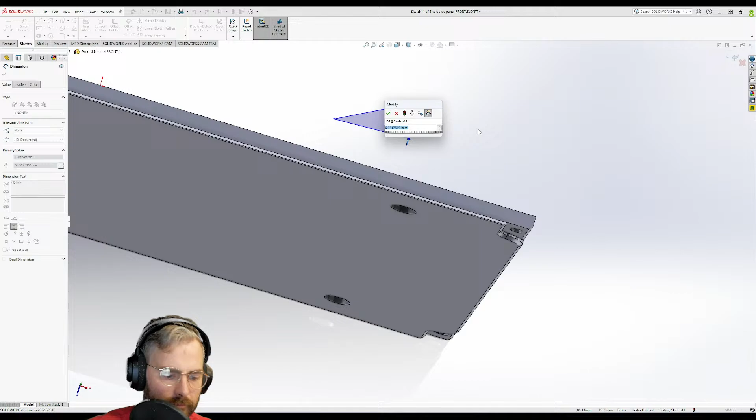All right, I'm just going to use Solidworks to do some math here. All right. We've got 1 mil here. This guy here is perpendicular to that. This is a weird thing. All right, 1 mil.

Actually, let's just go normal. It's this. All right, this is what we're sketching on. We're going to go here, here, here. This is...

Let's see, kind of wondering what the angle is on these. These are 6.5. 6.5 divided by 2. Got this right here.

And I don't know if this is really going to affect it, but this to here is 3.72. 3.72 divided by 2, oof. And this to here is 1 mil. So this angle here is what? 35 degrees, okay.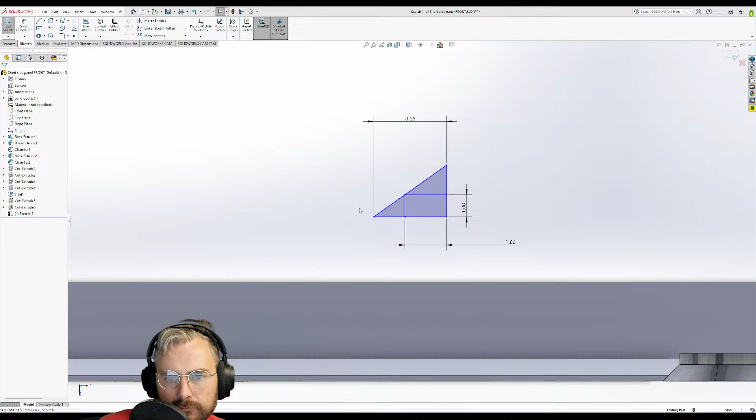So we want to do a 35-degree chamfer on here. Chamfer, 35 degrees. And you are not going to be 10 mil, you're going to be 1 mil. Ooh, but is it reversed? Yeah, it's a bit flatter. We don't want that. This is 45, yeah. So it's going to be 55 degrees. That's what it is. Boop.

So these will be here for that fan to sit flush. Or those fans. Flatter, like your chest. Oh, man.

Oh, you're typing somewhere else? Oh, no.

All right, let's see, we got this here. Oof, it's getting close to 1 o'clock in the morning. We're going to stop it there. I'm going to continue on and put that grid pattern in here. You did miss the opportunity to zing. Sorry about that, but...

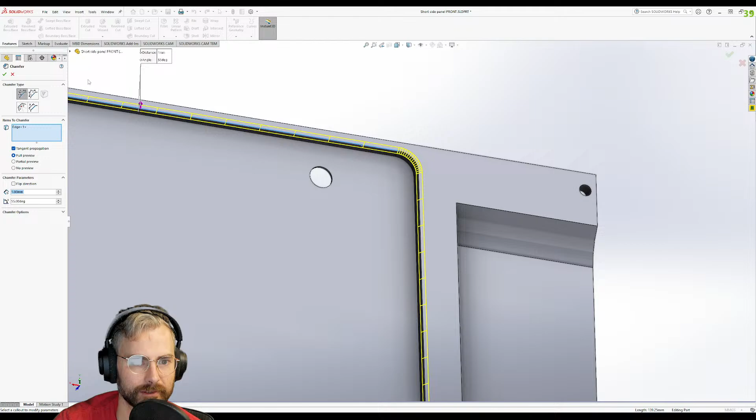But yes, here we go. I'm gonna put a chamfer on here because why not? 0.75, I believe. Oh, is that chamfer also 35 degrees? 45 degrees - no, we want this to be 45 again. There we go, beautiful, absolutely beautiful. This is definitely going to be printed like so.

And I love how I got the cutout for the other thing. You know what, I am going to have that other part here. Probably put some holes there for those other hardware pieces, just to mount that GPU there a little bit more so. But yeah, I'm excited. I'm going to put a hole here - or not a hole, but I'm going to put that mesh there. And then we will have some airflow coming in from that.

This guy here is going to actually pull some air in as well and dissipate it with - this fan's actually going to pull air through. This is going to be pulling air in and pushing out. I'm wondering if I should vent this one, if this should be pulling air out, especially if I'm putting it like this, right? It's going to sit like this. This should be pulling air out. No, I think this should be pulling air in, because it'll be blowing air in towards the CPU cooler.

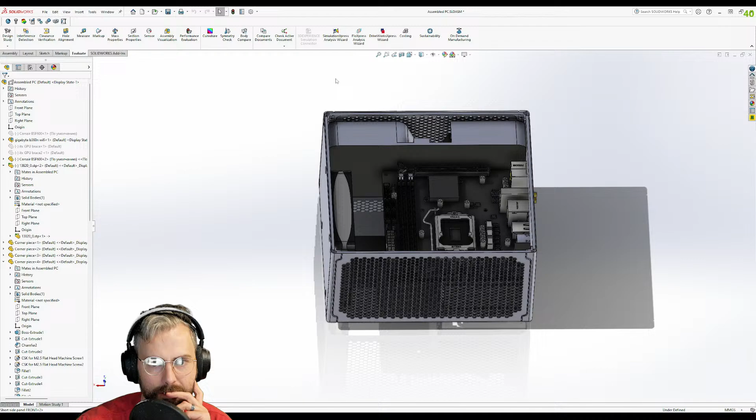The only issue is that if we have positive pressure in here, it's going to want to push air out of there. But if I'm pulling it out this way, it's going to be negative air pressure. I could probably put some 80 mil fans in here, but I don't have any 80 mil fans. If my problem is only fans with this case, I'll accept it.

But yeah, I'm going to get that mesh pattern on here, but I am going to print this panel. I think this panel here is ready to print. I'm very curious how that will fit together. And then once that one's printed and ready, I'm going to probably put some supports on here, probably something for this guy here to go on.

But yeah, this will just sort of sit. And that other mesh, or this other panel here, will probably be all mesh. This side here, totally mesh - well, except for right here. Actually, yeah, it'll be just mesh here.

Yeah, I'm excited for how this will go. It's starting to look good, it's starting to look like a PC.

I'm opening an OnlyFans for my PC. It's a niche market, you know, for like the smaller bodied, the smaller builds, you know. But who knows, maybe it'll get some traction with these fans.

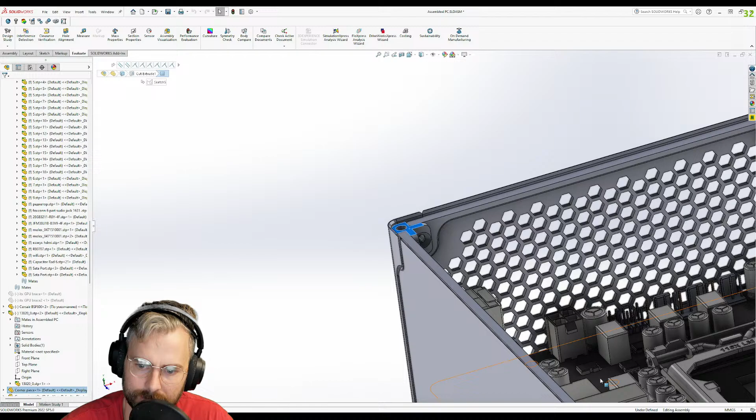Yeah, what are we looking at here? Height from the motherboard here is going to be... no, not to there, to here. What are we looking at? Surface to this surface, 55.7 millimeters. So not a lot of clearance, especially if we're going to use the stock Intel cooler.

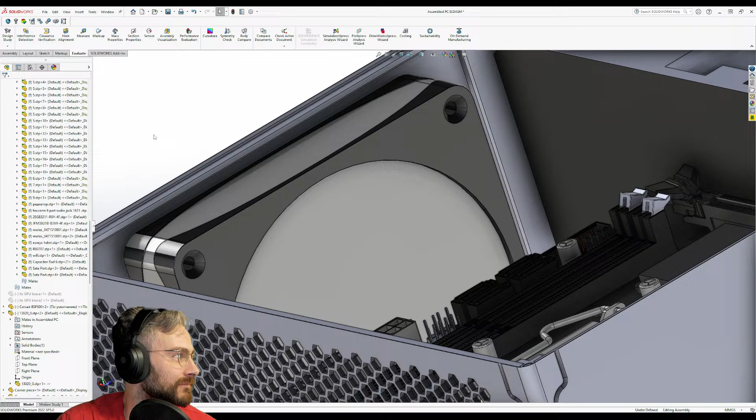Yeah, you did say that Sabrina should draw me pregnant during her art stream. You'd pay money to see Sabrina draw a pregnant Jay, or would you pay money for the pregnant Jay piece? Or both? I don't feel comfortable with this money-making endeavor.

You'd pay money to not see that? Oh man, I can make so much money. Tell you what, Spinny, you pay me a certain amount and I make sure I won't even share the link with you. There you go. Oh my gosh, pregnant Jay. Sweet Jay with child, sweet Jay with baby.

They're harassing me on my stream, talking about a sweet baby-carrying Jay. They're harassing me for my useless nipples. Oh, they're useless. They are. They're terrible. All those poor people coming here for a Solidworks stream and hearing about my nipples. This is terrible, they're like, I just wanted to learn about design software, and here you are talking about your nipples. How dare you, sir?

Meep. Oh, I guess I could show a bit of how to mate things in here.

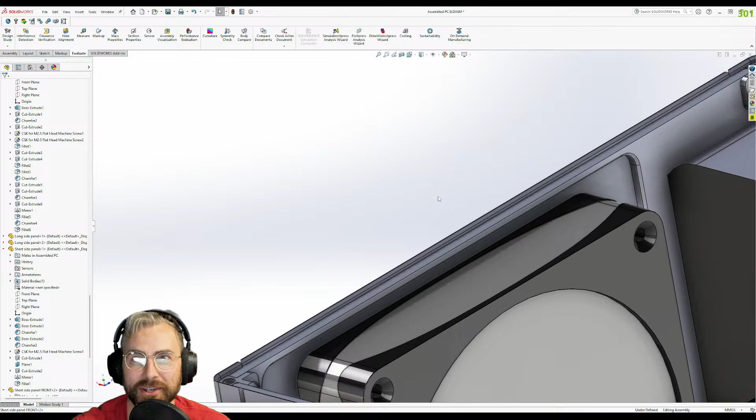You know what, Jay? This is extremely entertaining. Oh, you're only here for the maple syrup content. You know what, it is entertaining, but the problem is people do not, you know...

Insert another fan here, so I just hit control and click-drag to create a new part. I'm going to delete this part and show sort of how you can mate in this delightful program. So here you can actually click the surfaces that you want to interact with.

Oh yeah, insert it. Oh my god. Can't go. I knew it. This is not that kind of a stream.

This is the best, you need to teach Jay how to use Streamlabs so we can get plugins to throw stuff at him during stream. Oh my gosh, bully streams. Yeah, she is laughing, my job is done. Oh man, you guys are killing me.

All of you, so here I'm mating now. I'll show you guys how to mate in Solidworks. It's not that kind of mating, all right? I'm just showing you how to insert and put different surfaces together, and oh my goodness, this is just... Biology with Jay. Well, when a fan loves a surface very much, you hit it, it gets coincident, aka it touches.

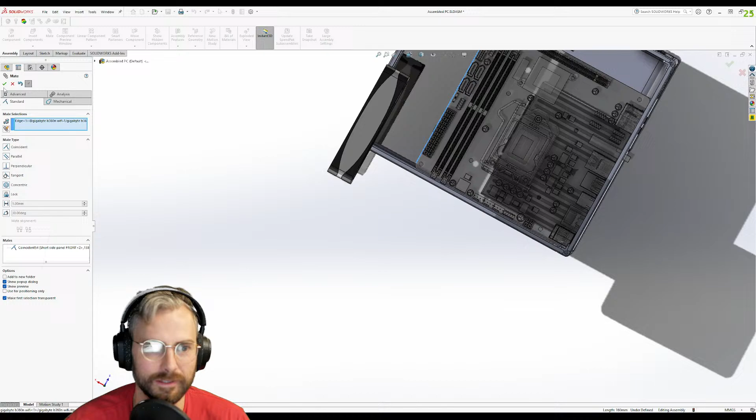So now this fan is coincident with this surface. I can't move it. So if I'm looking, actually no, oops, I just touched that component. Oh my goodness. So this fan is coincident with that surface, so now we're going to make this concentric.

So these circles are now concentric, so it moves into place, it's concentric and it's flat. Now it will rotate on that hole, as you can see, it's rotating on that hole. So really what I need to do is constrain two holes at the same time in order for this fan to be positioned properly.

This is rotating on the hole. Distraction Saturday night. Oh my goodness.

So there it is, now it's fully constrained. And oops, did I just cancel those mates? No, it's fully defined, so this is fully defined in place, mounted on those holes, and this will then be used for that.

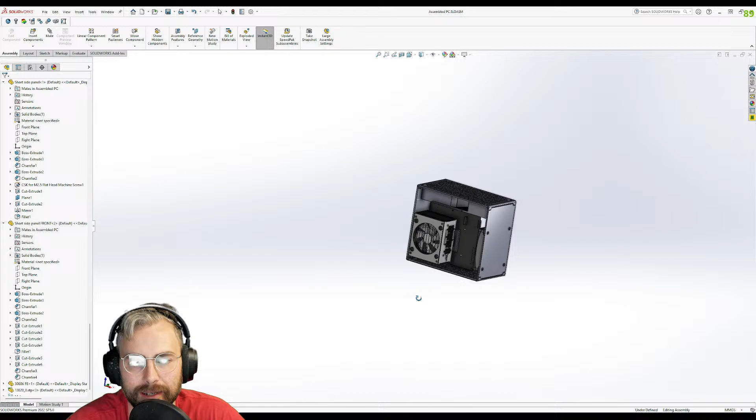When you try too hard, everyone goes home frustrated. It's true, you just gotta go with it, let it flow, let it go. The best is when you start singing Frozen, that's really the best way to do it. Yeah, so this is gonna sit like so. Try too hard or try too hard? Oh my gosh. I don't know, if you're trying too hard to try too hard, then yeah, Lil Alan has infected you with her movies. It's true.

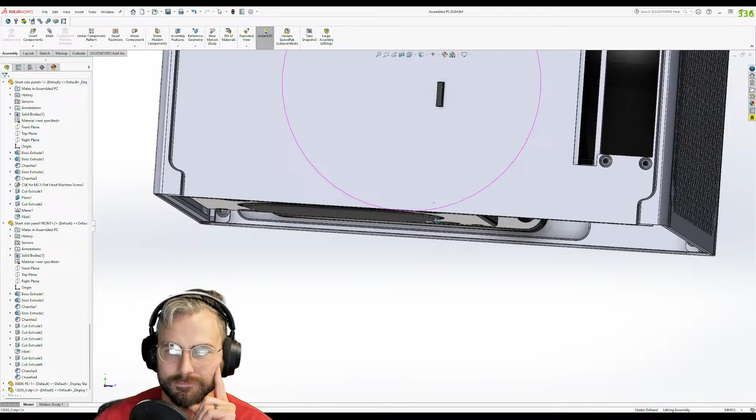That fits in there nicely, quite nicely in fact. Poison pawn coming at me. You can't have poison pawns, that's not even a real thing.

Bishop to f6 or bishop to g4? f6 and g4, wait a second. f6 or g4, f6 or g4. I say go g4 - g4 will put, if the king is still in position and that pawn is moved out, it'll put the king in check.

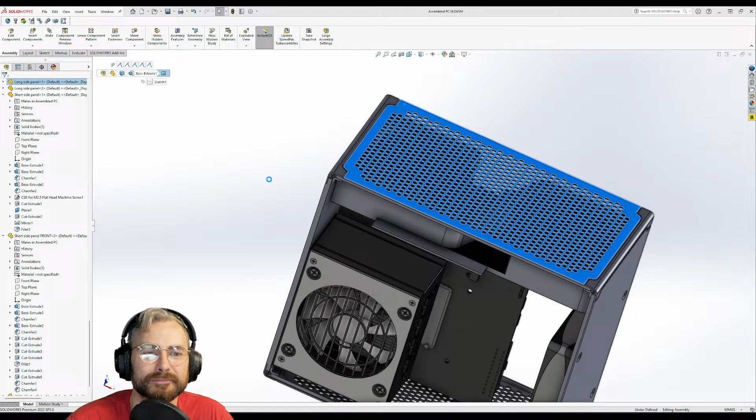My computer, why? Nope, preparing data. Actually no, I'm gonna cancel that. Ooh, hello, wait, is this saving? Oh my gosh, I'm saving the entire... no, I don't want to print this whole thing as an STL. I just turned it all into a vector, or a mesh.